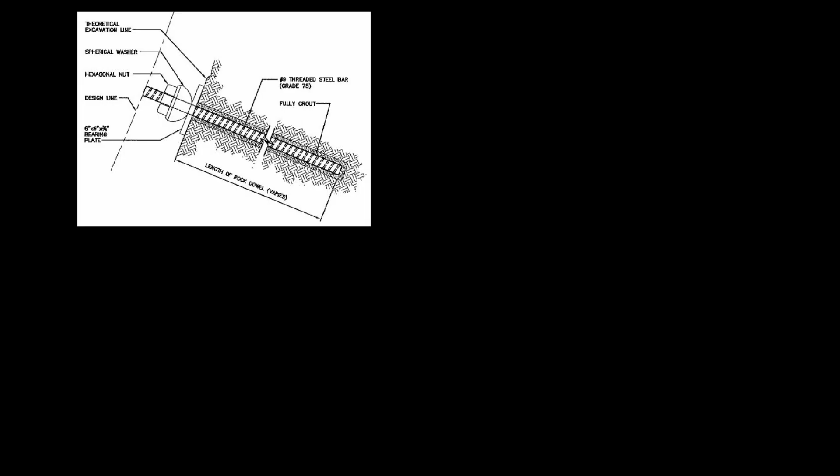In this video, we are going to perform a laboratory experiment that simulates how rock bolts can be used to stabilize a jointed rock mass. The experiment is based on a rock bolt model shown in Practical Rock Engineering by Evert Hoek, which is based on an experiment by Tom Lang.

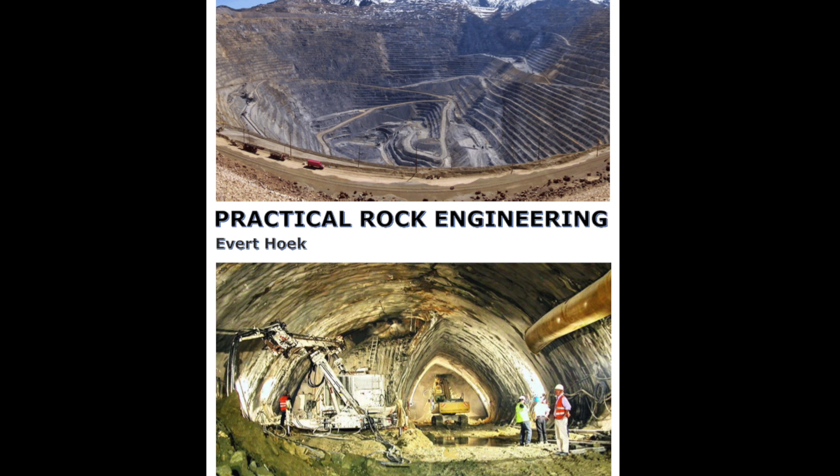The experiment will consist of filling an elevated box full of crushed rock to simulate a jointed rock mass, tensioning a number of rock bolts through the crushed rock, and removing the bottom of the box to see if the crushed rock remains suspended or stabilized by the rock bolts.

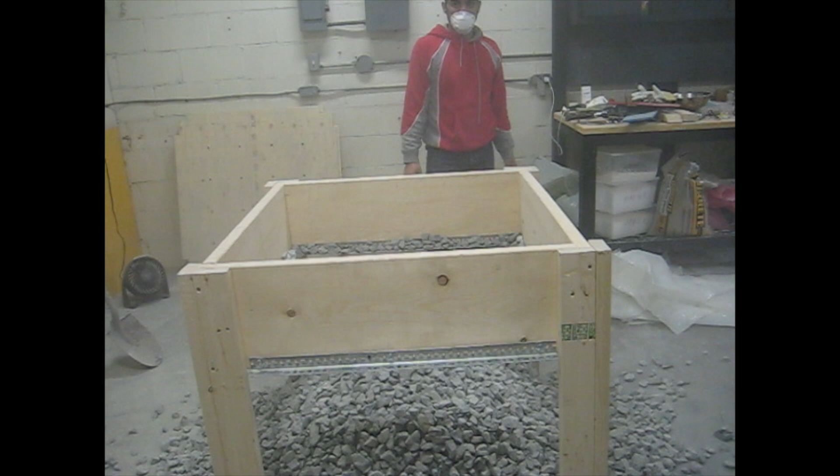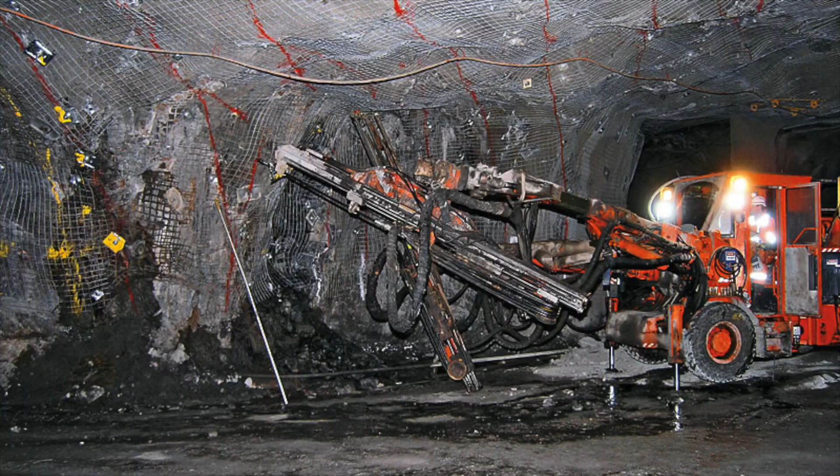Background. Rock bolts are commonly used in the civil and mining industries to stabilize the walls and ceilings of tunnels. In order to apply a rock bolt, a hole is first drilled into the rock, then a rock bolt is inserted and grouted into place. Once the grout has set, the rock bolt is tensioned.

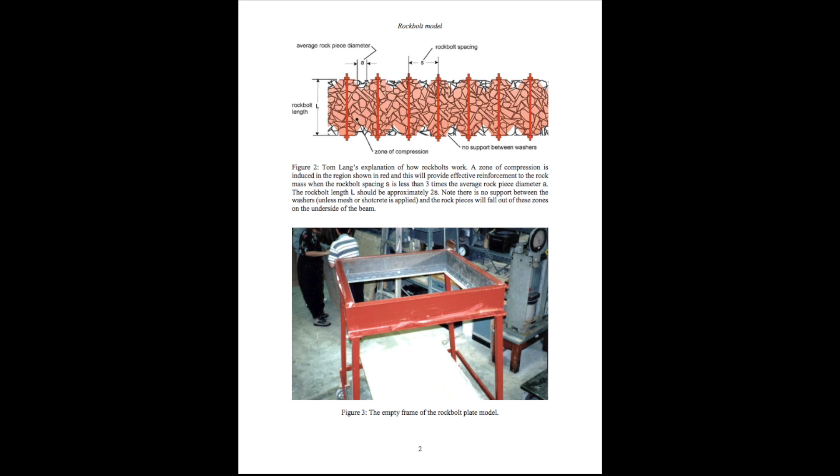This figure, as shown in the Practical Rock Engineering book by Hoek, shows the basic principle of how rock bolts work. When the rock bolt is tensioned through a jointed rock mass, the compressive forces that the bolt exerts on the rock mass cause increased shear resistance along the block-on-block interfaces.

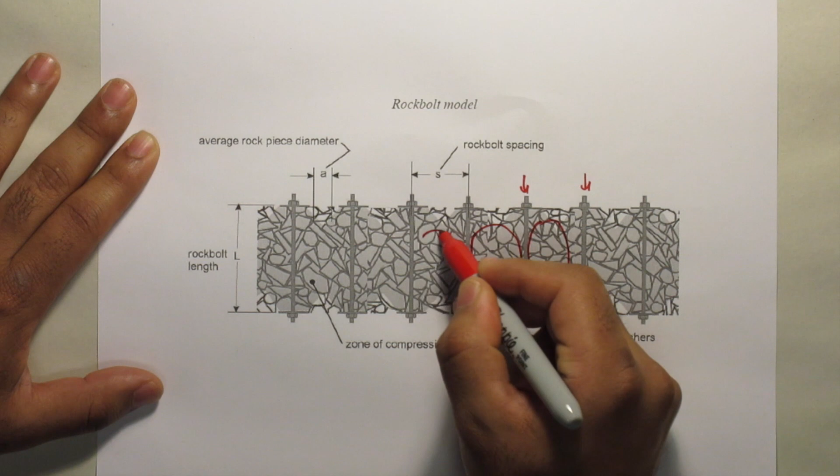In terms of the rock bolt model, the compression forces from the rock bolts cause increased particle interlocking and subsequent increased shear strength. Compression arches form between each rock bolt.

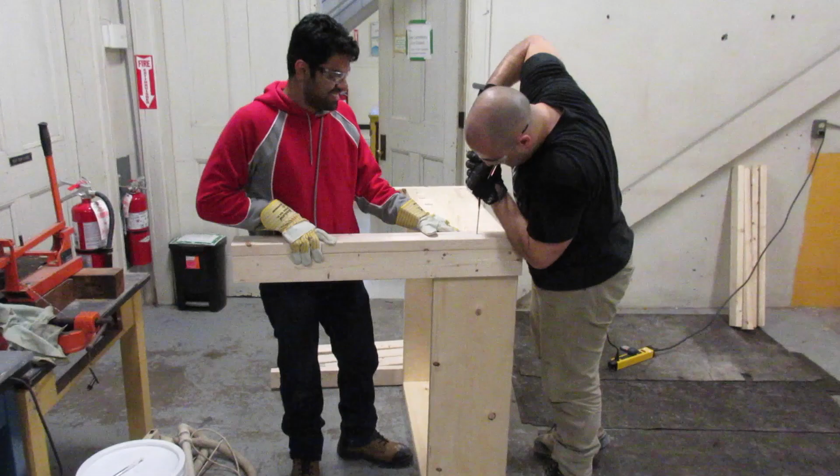Design. Our rock bolt model is primarily constructed out of wood. The internal dimensions of the box are approximately 3 feet by 3 feet and the box stands about 3 feet high. 2x12s were used to construct the box and 2x4s were used to construct the box legs.

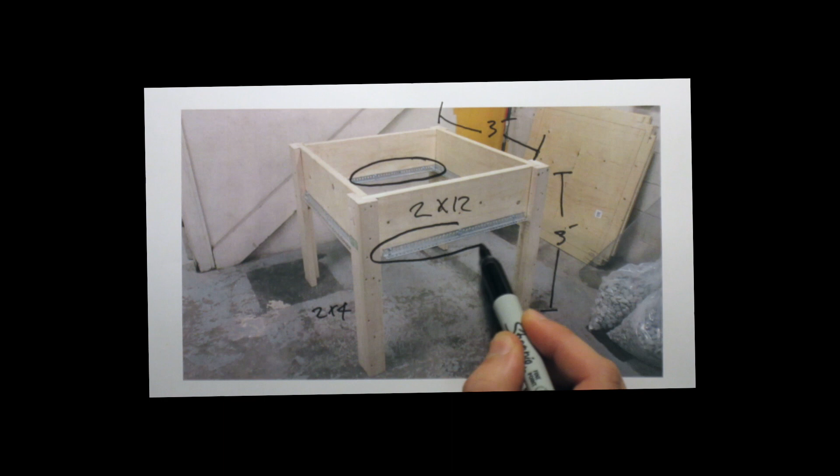1.5 inch angle steel was used to create a lip around the inside of the box to help support the crushed rock, and around the outside of the box to allow us to clamp on the box base plate. The box base plate was cut out of 3/4 inch plywood and holes were drilled in a set grid pattern to allow us to place the rock bolts.

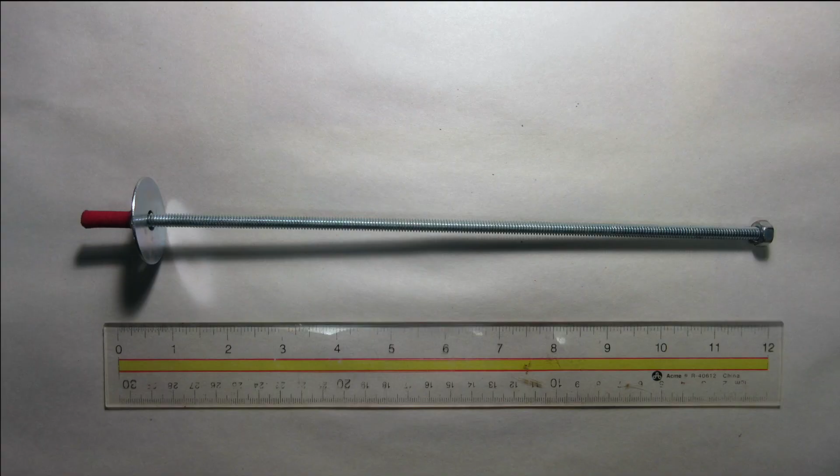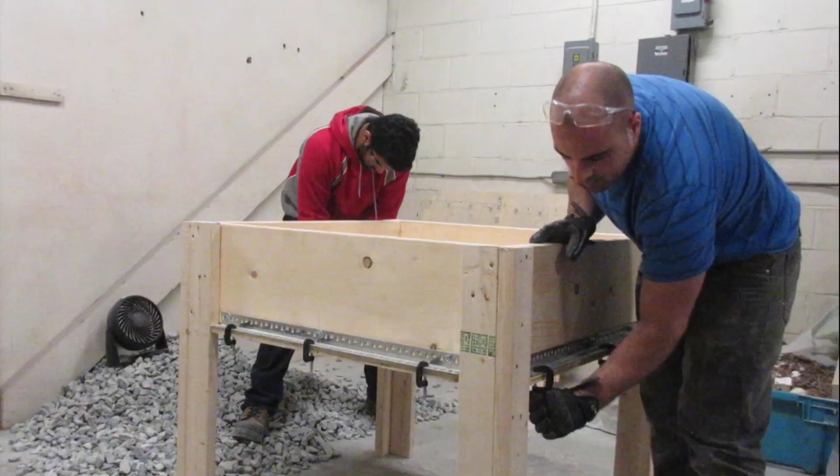Our miniature rock bolts are approximately 12 inches long and cut out of 1/4 inch threaded steel rod. 1.5 inch washers were attached to the ends of the rods as shown. After some trials, the washer sizes were increased to 2 inch diameter. 1 inch clamps were used to attach the base plate to the angle steel. The crushed stone used consisted of 1 to 2 inch clean gravel that was generously donated by a local quarry.

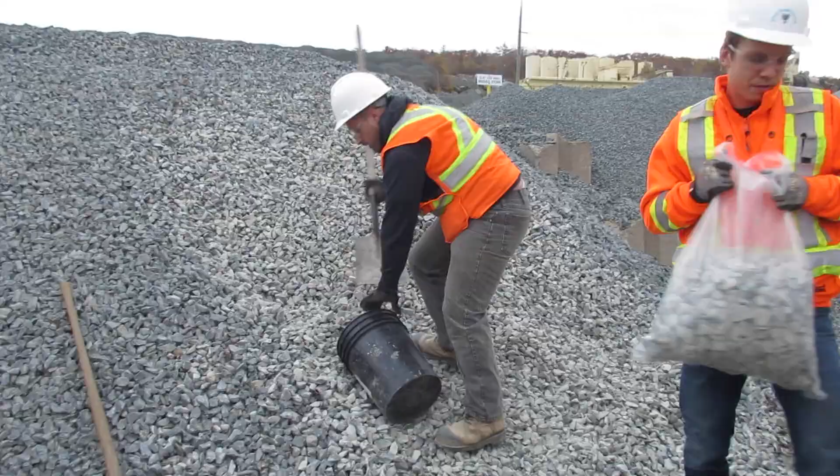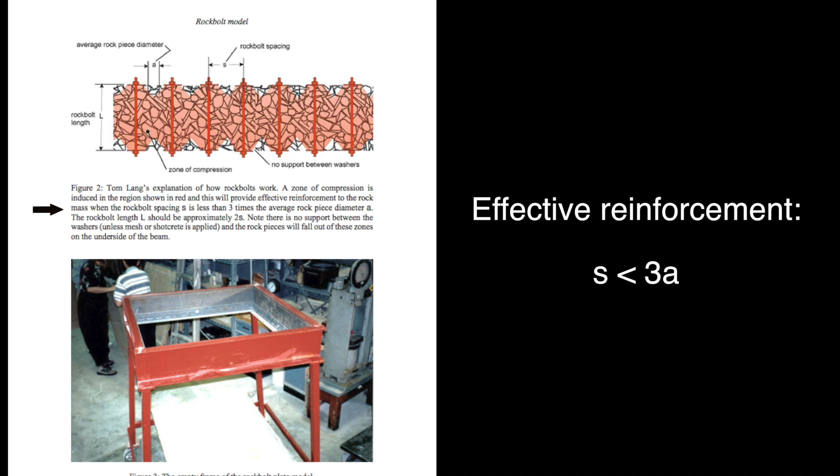Procedure. As described by Hoek, the rock bolt model should provide effective reinforcement to the rock mass when the rock bolt spacing is less than 3 times the average rock diameter. We wanted to test this claim and decided to conduct several trials where the bolt spacing was varied from 8 inches to 6 inches, 5 inches, and finally 4 inches.

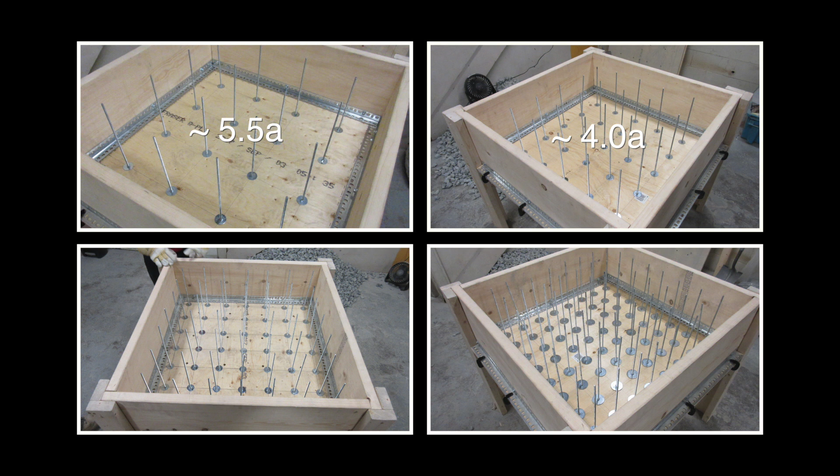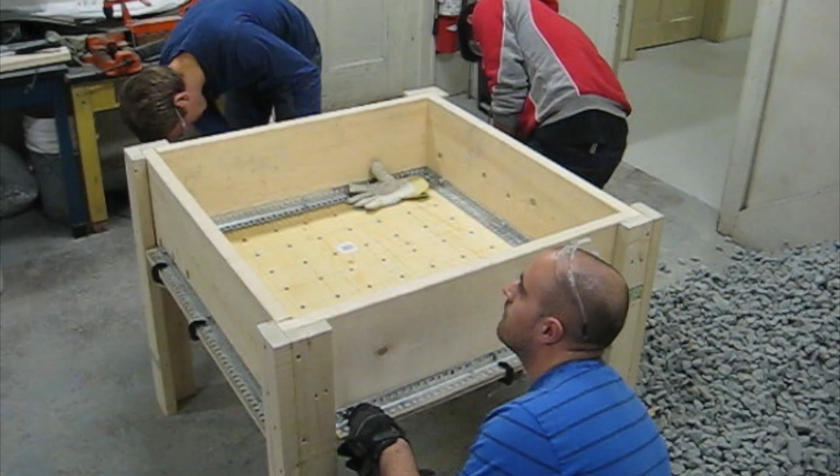Assuming an average rock diameter of about 1.5 inches, this means that our trials range from about 5.5 times the average rock diameter down to about 2.5 times the average rock diameter. The procedure for filling the box and removing the base plate is as follows. 1. Attach the base plate to the box using clamps. 2. Place the rock bolts into the selected grid spacing pattern.

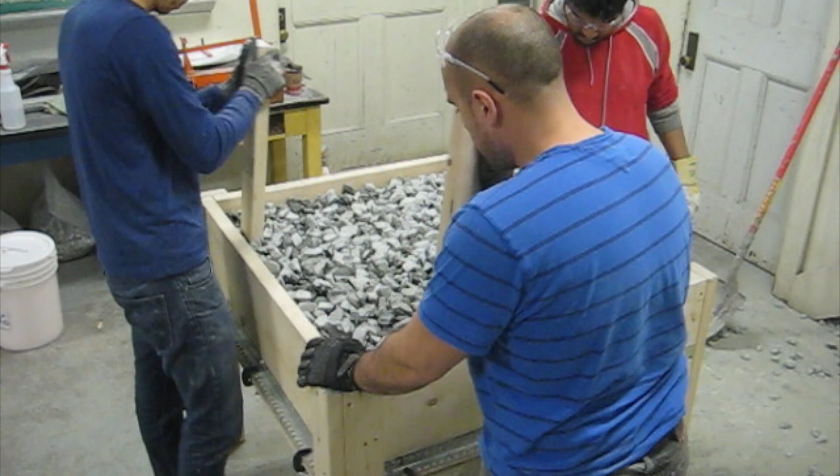3. Begin filling the box with gravel, being sure to manually level out and maneuver the gravel in order to ensure tight particle interlocking. 4. Compact the gravel in 3 to 4 inch lifts using hammers or spare 2x4s, and use a spray bottle to dampen the gravel in order to keep dust down. 5. Place the final lift of gravel so that the entire rock mass is about 10 inches thick.

6. Attach the top washers and tension the nuts until the washers begin to bend slightly. 7. Begin removing the clamps that hold the base plate to the box and ensure that everyone has their feet clear, is using proper lifting techniques, and is using effective communication to coordinate the removal of the base plate.

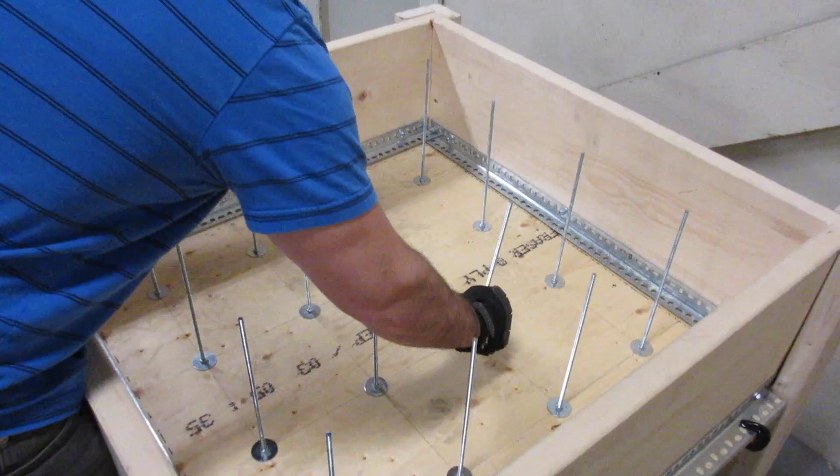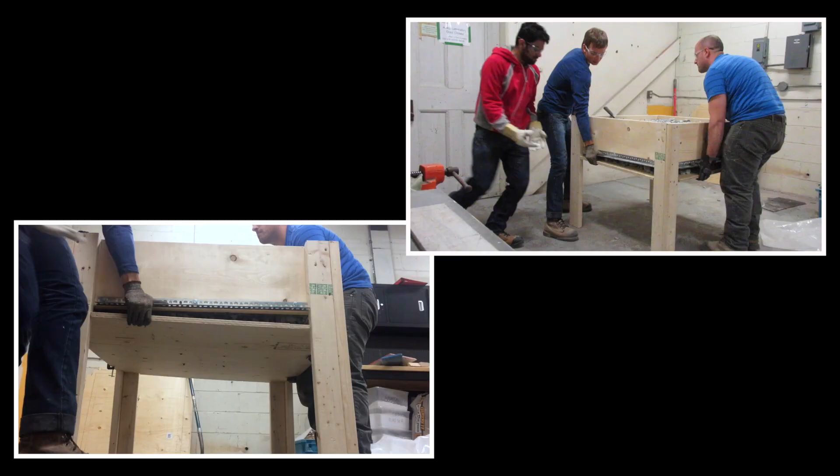Trial 1. Trial 1 consisted of 8 inch bolt spacing. This spacing required 16 bolts. We loaded the box with gravel, tensioned the rock bolts, and removed the base plate. As you can see, this trial failed the moment we began to remove the base plate.

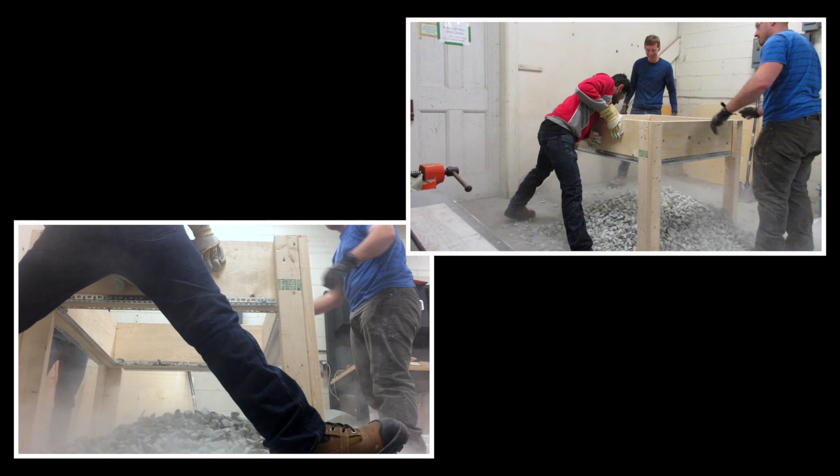Causes of failure likely included too much width of bolt spacing, not compacting the rock well enough, not providing enough tension to the rock bolts, and not placing the bolts close enough to the perimeter of the box.

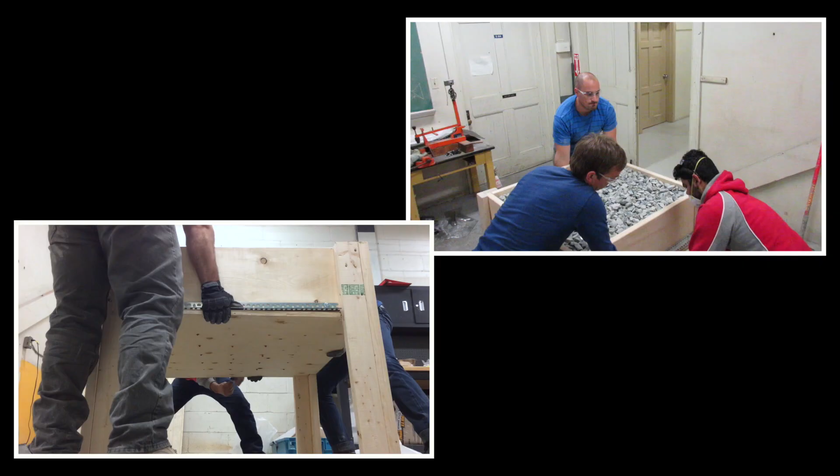Trial 2. Trial 2 consisted of 6-inch bolt spacing. This spacing required 25 bolts. Once again, we loaded the box with gravel, tensioned the rock bolts, and removed the base plate. As you can see, this trial failed the moment we began to remove the base plate. However, we could feel more support provided by the bolts than in trial 1, prior to letting go of the base plate. This indicated that the rock bolts were providing some assistance.

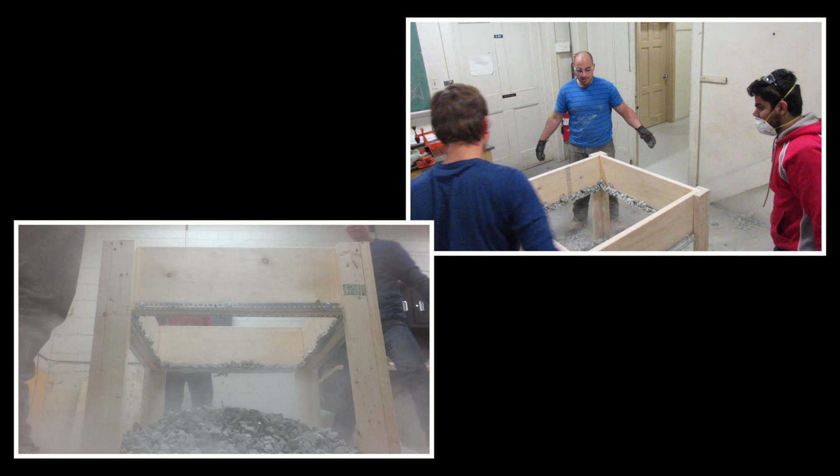Causes of failure likely included too wide of bolt spacing, not providing enough tension on the rock bolts, not placing the bolts close enough to the perimeter of the box, and too small of washer size.

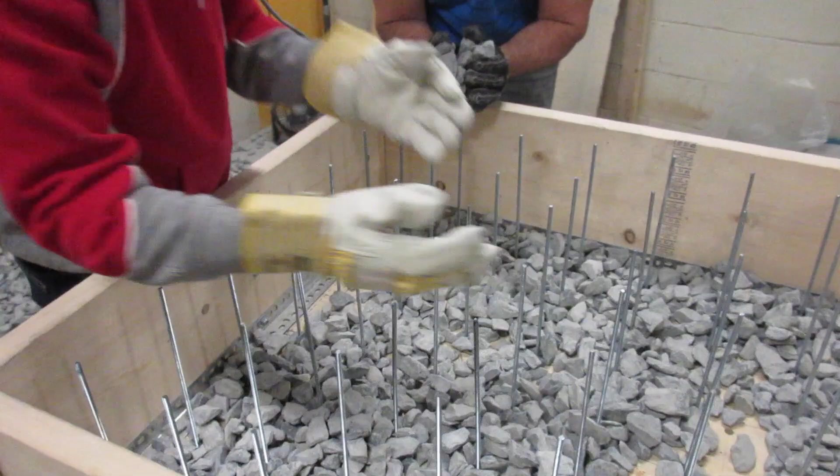Trial 3. Trial 3 consisted of 5-inch bolt spacing. This spacing required 49 bolts. Let's see if this trial was successful. As you can see, this trial began to fail in the center as we removed the base plate. However, the rock mass appeared to be somewhat supported around the perimeter of the box prior to total collapse. Causes of failure likely included too wide of bolt spacing and too small of washer size.

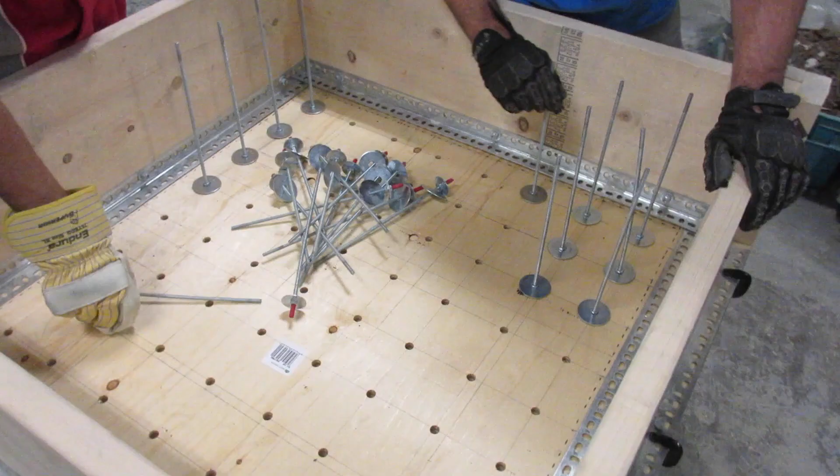Trial 4. Trial 4 consisted of 4-inch bolt spacing. This spacing required 64 bolts. This was also the first trial where we used 2-inch washers instead of the 1.5-inch washers. We loaded up the box with gravel and provided more than enough compaction between lifts, tensioned and retensioned all the rock bolts, and removed the base plate.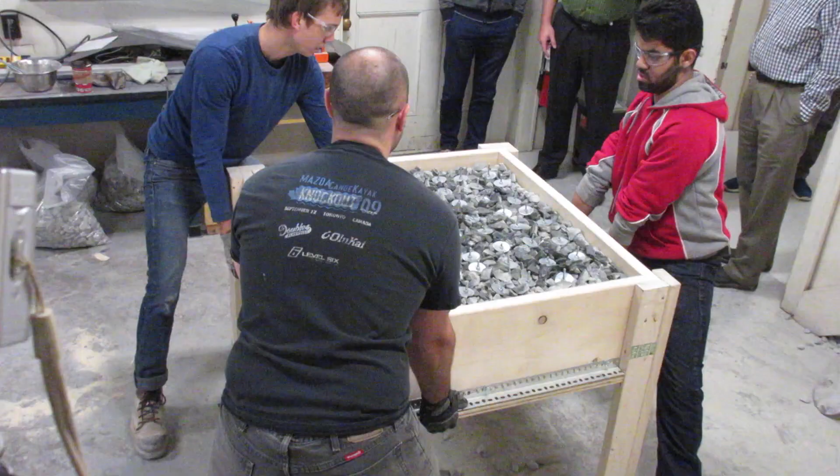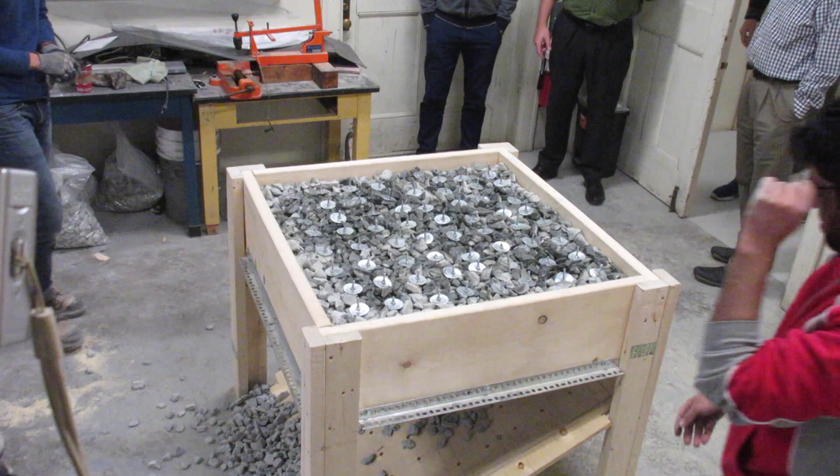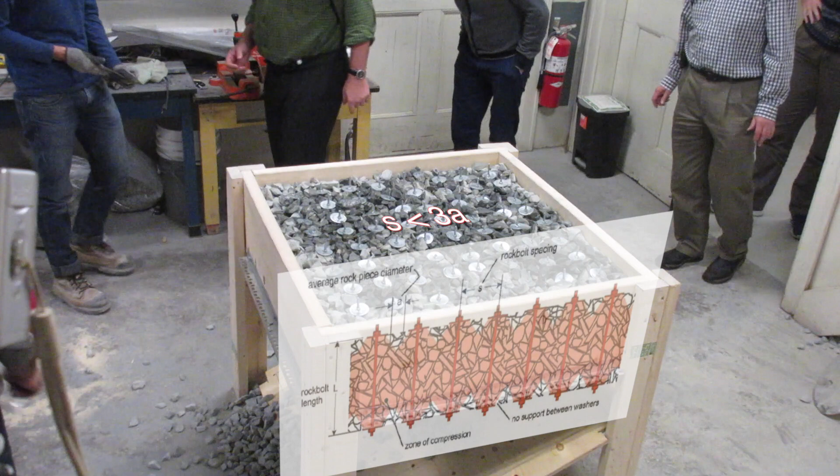As you can see, this was our first trial to be successfully supported by the rock bolts. The success of this trial was likely due to the close bolt spacing. This confirms the statement made by Hoek that the rock bolts should provide effective reinforcement to the rock mass if the bolt spacing is less than 3 times the average rock diameter. Also, the larger washer size was likely a contributing factor.

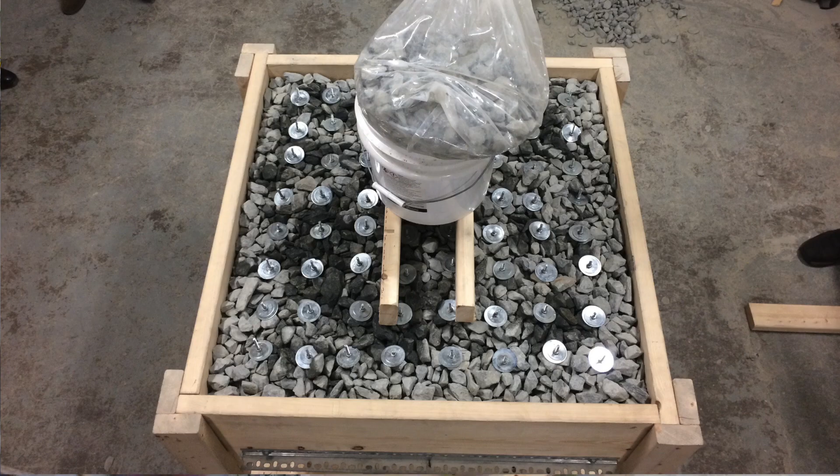We decided to induce failure by tapping the board on the side of the box to cause more and more rocks to fall out of the rock mass. Once the compression zone around one of the bolts was compromised, the entire system collapsed. Let's see that again in slow motion.

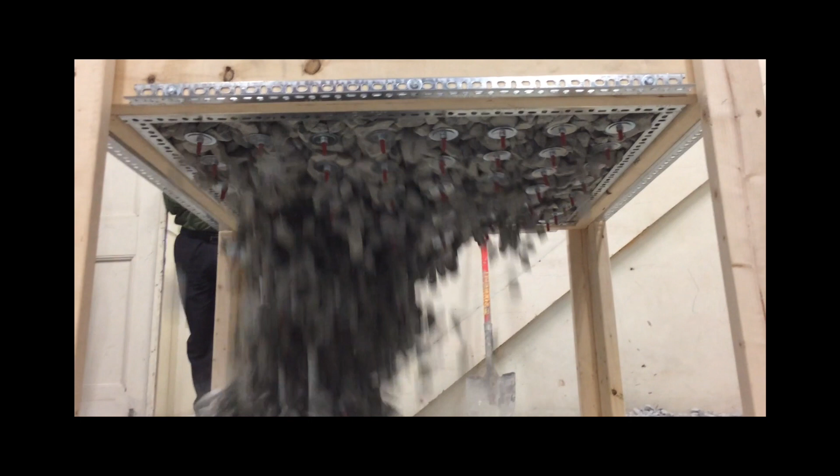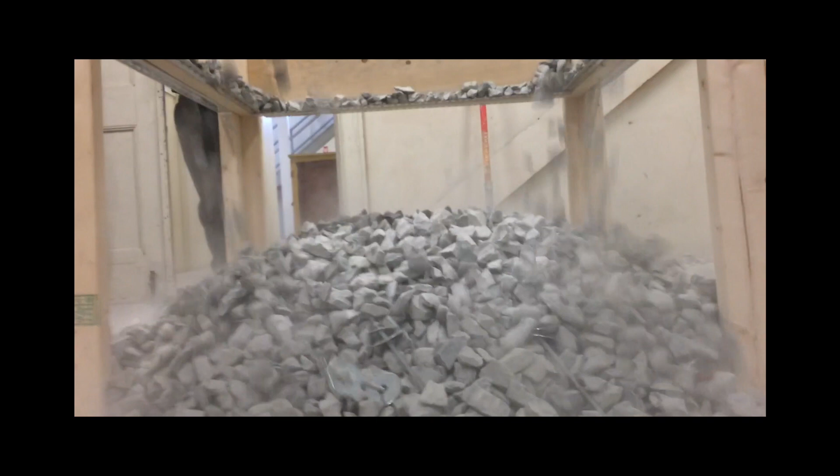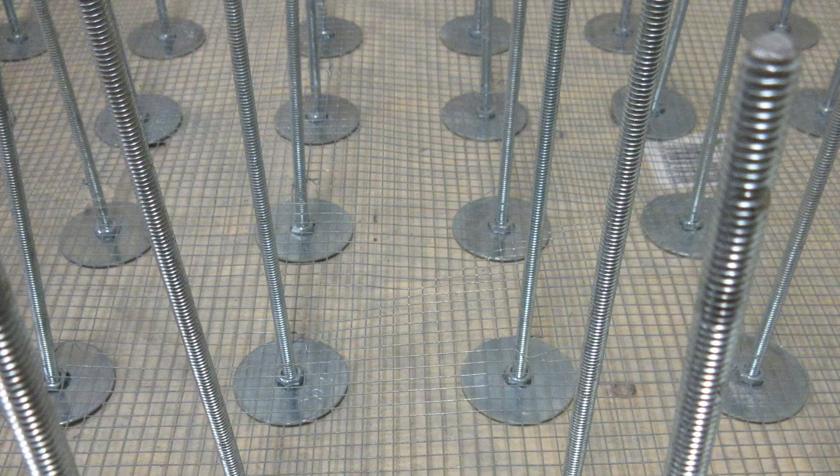Trial 5. Trial 5 consisted of 4-inch bolt spacing and 64 bolts. With the success of Trial 4, we decided to repeat the trial with the addition of a mesh across the bottom of the rock mass. The purpose of the mesh was to contain rocks that would otherwise fall out of the bottom of the rock mass if they were not held within the compression zone as seen in Trial 4.

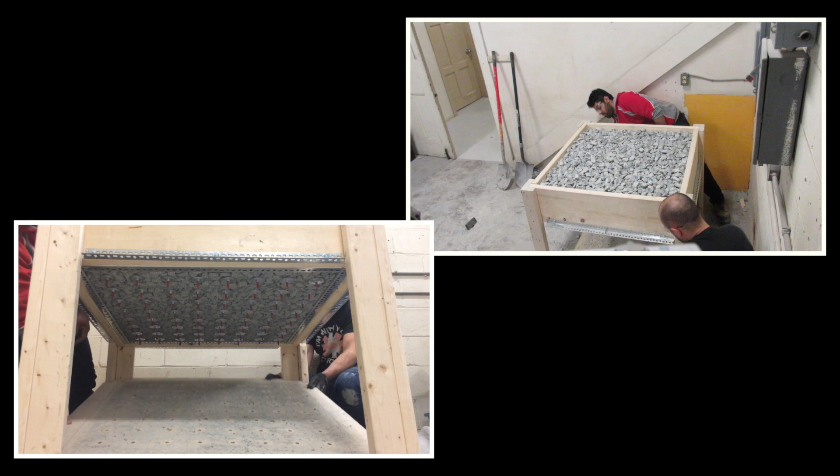After performing the routine of filling the box with gravel and tensioning the bolts, we removed the base plate. The rock mass did not appear to move whatsoever, and any loose rocks were contained by the mesh. Although this test was a bit boring, it was nice to not have to clean up all the gravel for once. The success of this trial was again due to the close bolt spacing and larger washer size.

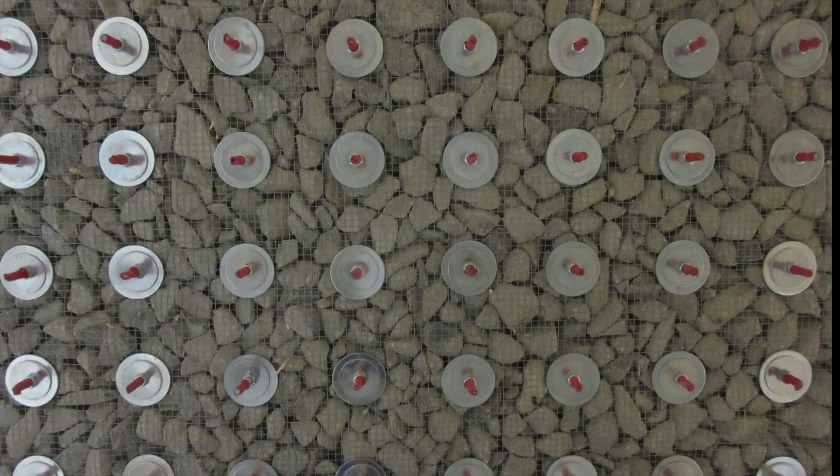The addition of the mesh helped to keep the entire rock mass supported and contained. A photo of the underside of the box shows a nice, clean, supported rock face.

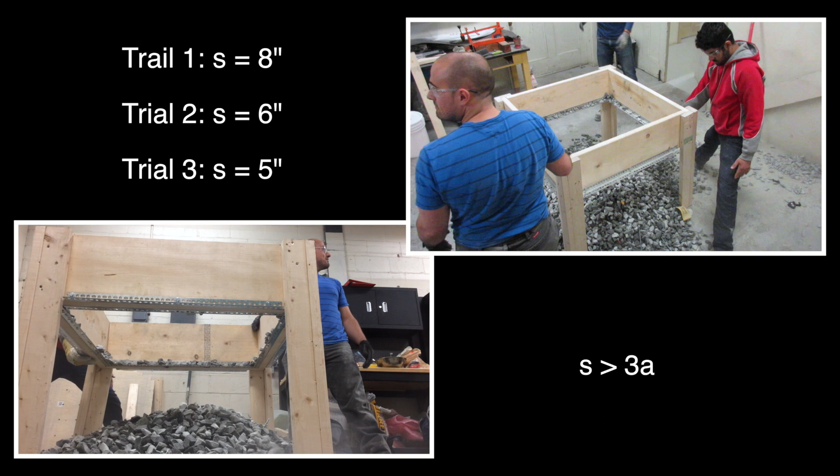Conclusion. This video demonstrated how rock bolts can be used to support a rock mass using a rock bolt model that we constructed. Several trials were conducted where the rock bolt spacing was varied from 8 inches to 6 inches, 5 inches, and finally 4 inches. Trials where the rock bolt spacing was greater than 3 times the average rock diameter resulted in failure. Trials where the rock bolt spacing was less than 3 times the average rock diameter remained stable.

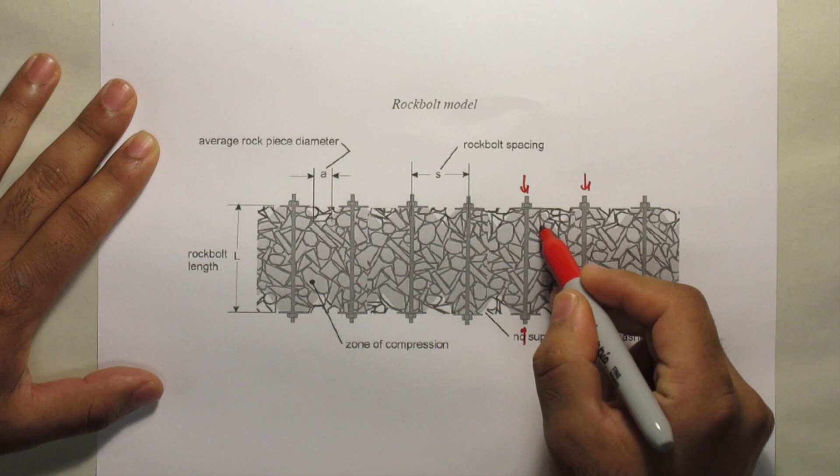Rock bolts provide support to a jointed rock mass by creating a compression zone and arching effect between the bolts that prevents the rock mass from collapsing. A steel mesh can be added to the face of the rock mass to prevent falling of loose rocks.

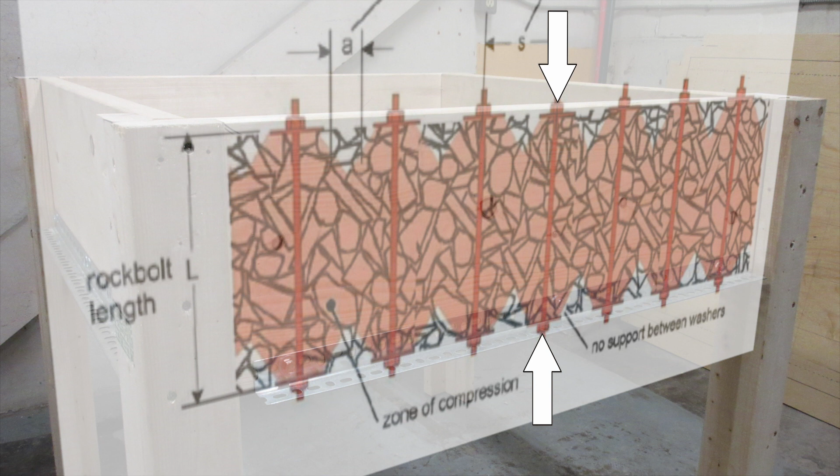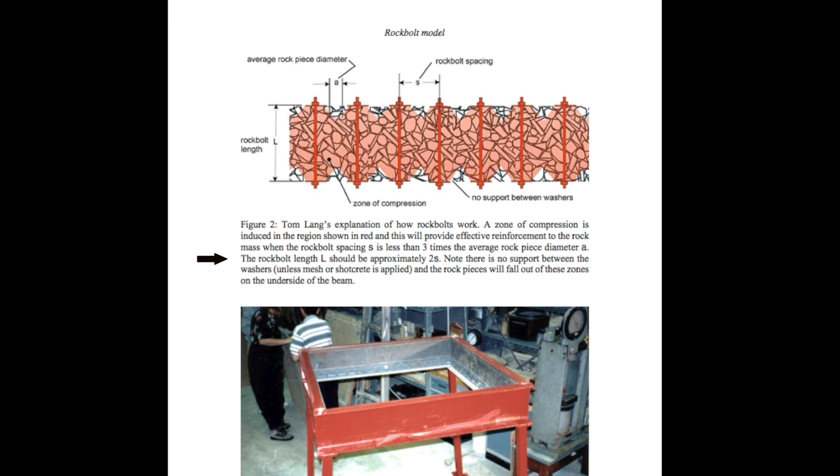Although not specifically addressed earlier in this video, it should be noted that the thickness of the rock mass can also have an effect on the stability of each trial. As described by Hoek in Practical Rock Engineering, the rock bolt length should be approximately 2 times the rock bolt spacing. Applying this clause ensures that there is adequate thickness of the compression zone between each rock bolt.

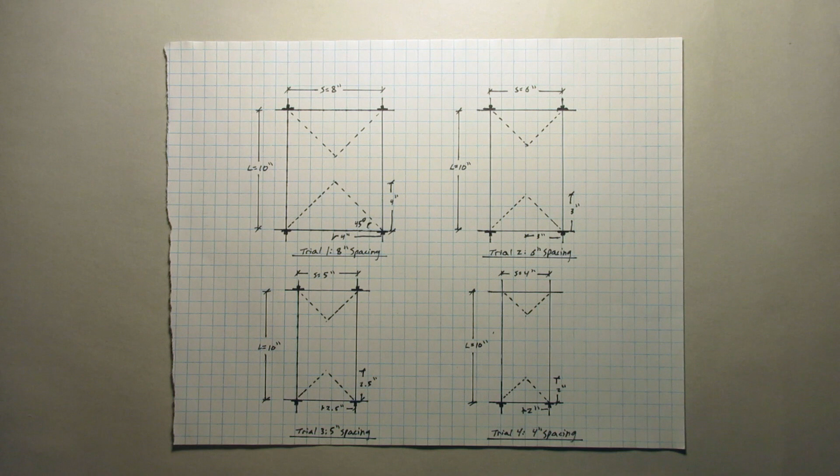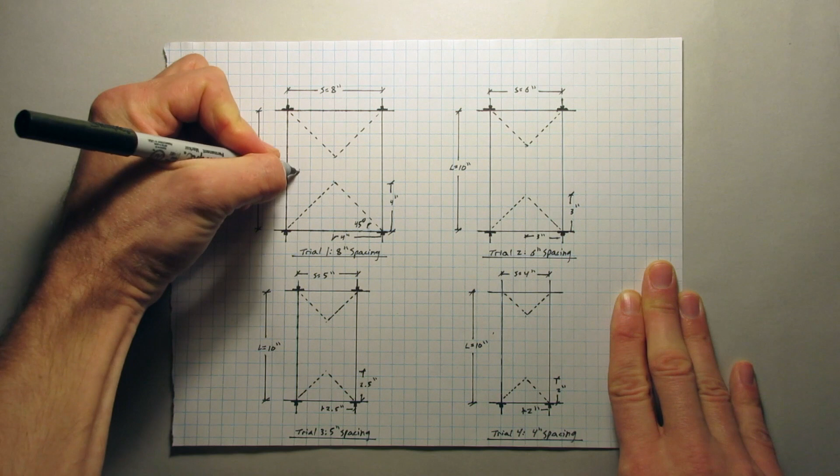If we consider our trials where we used a fixed rock mass thickness of 10 inches and assume a stress distribution that extends outward from each rock bolt at about a 45-degree angle, this means that the thickness of the compression zone ranged from approximately 2 inches in trial 1 with the 8-inch rock bolt spacing to 4 inches in trial 2 with a 6-inch rock bolt spacing, 5 inches in trial 3 with the 5-inch rock bolt spacing, and finally 6 inches in trial 4 with the 4-inch rock bolt spacing.

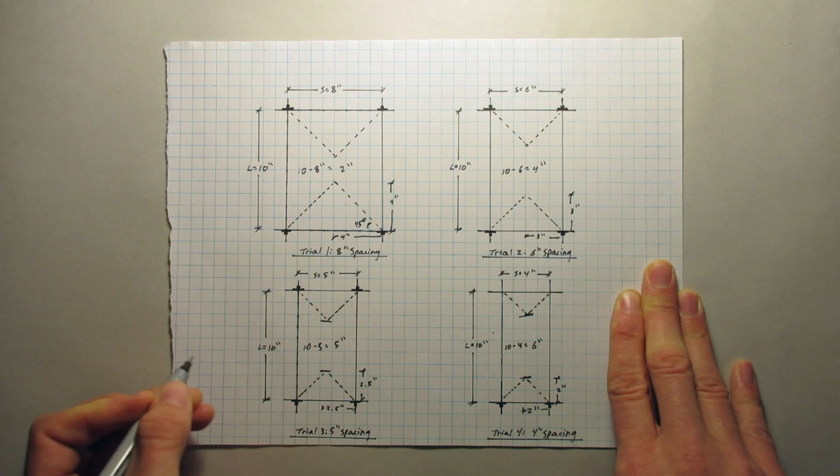As shown, only trials 3 and 4 had rock bolt lengths greater than or equal to 2 times the rock bolt spacing. This was likely also a contributing factor to the instability of trials 1, 2, and 3.

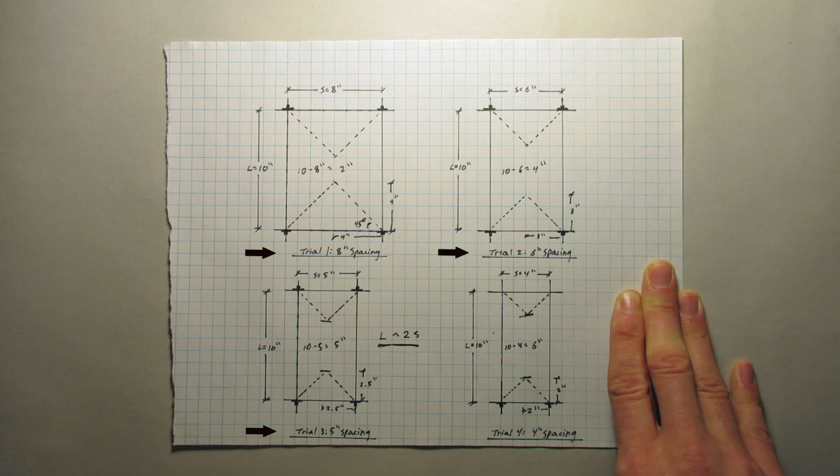This concludes our video. We hope we helped you gain a new understanding of rock bolts and provided you with enough information to attempt this experiment on your own.